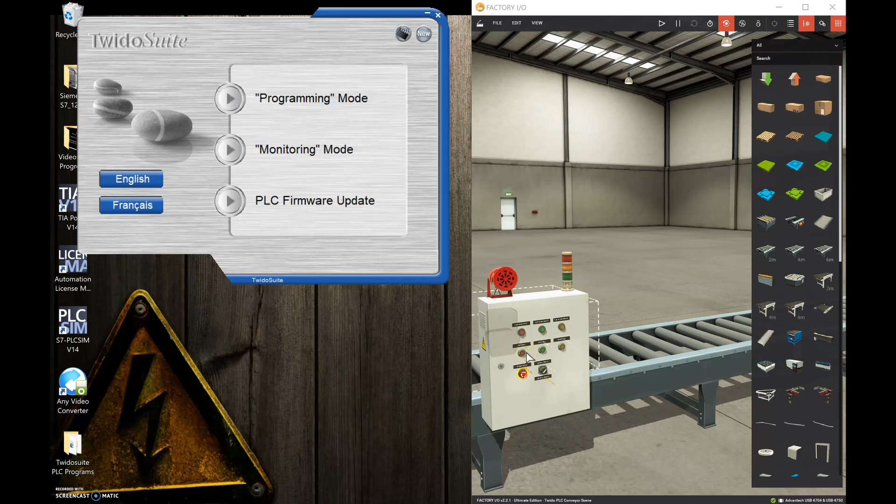All right, so let's see if we can get the TwidoSuite up and running, get everything set up for this guy, and then get it talking to the Factory IO, and then we'll do a 2-wire control just to start off with. So with the TwidoSuite, we're going to start off with the programming mode.

Okay, so we're going to create a new project. We're going to call this guy 2-wire control. We'll hit create.

Okay, next thing we're going to do is we're going to go to describe, and we're going to replace this guy with the PLC that we actually have.

Okay, so the base that we have is a compact base, and we have the CAE 40 DRF. So we're going to grab this guy, left click and hold the left mouse button down, drag it over, and drop it onto the page. There we go. Once we've got that guy in, we've also got the analog card.

So let's go to expansion modules, analog expansions, and let me just double check—I believe this is a TM2 AMM6HT. So just double check with the analog card that is beside your PLC. Looks good. Once those guys are there, then we're going to double click on the Ethernet connection.

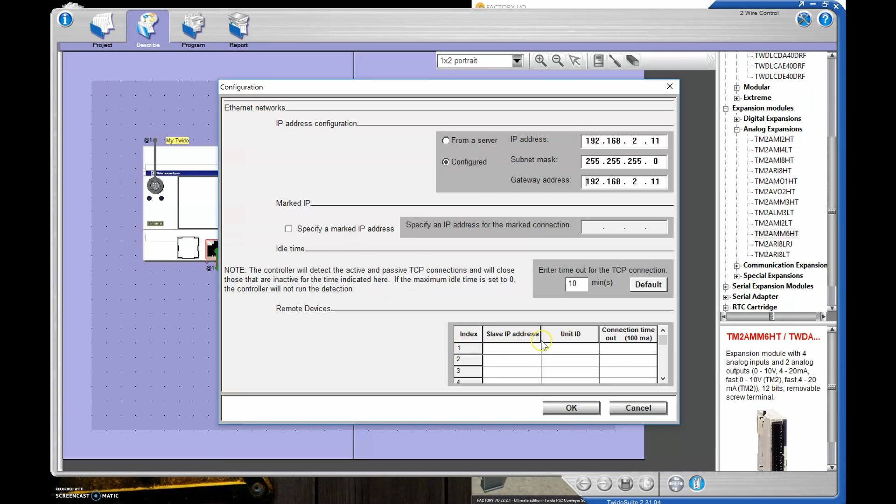Looks good. I'm not going to put in the touchscreen or anything yet, we're just doing the PLC. So we'll hit OK. Excellent. And the next thing we're going to do is we're going to go into program.

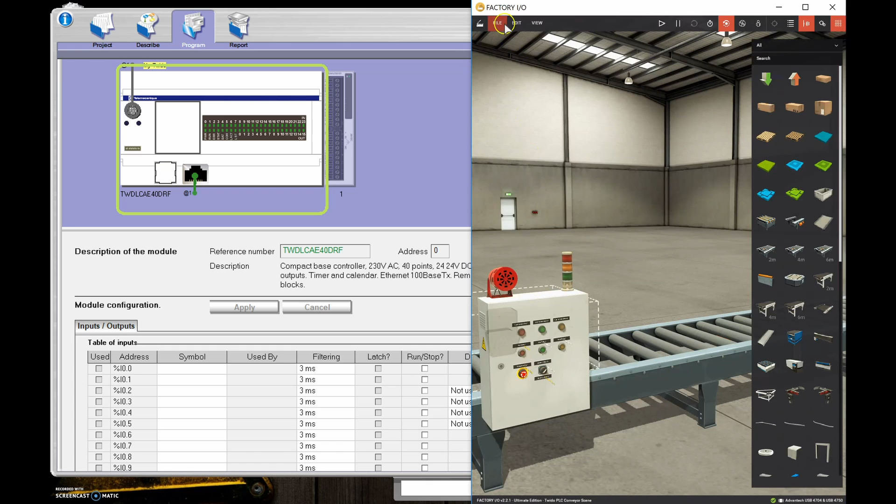Okay, so let's drop in all of our I/O that we covered in the previous video there. So let's bring up our Factory IO. We're going to go to File and Drivers. Excellent. Okay, and everything's already set up from the previous video there.

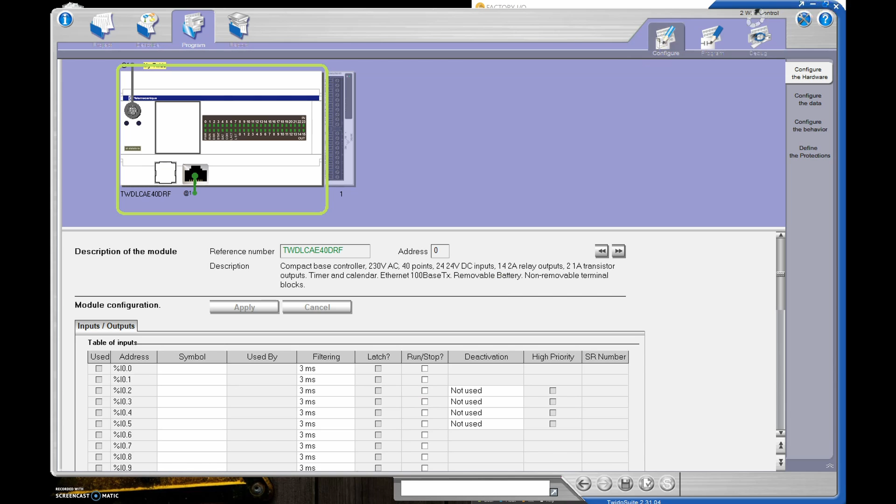So let's start off by just typing in each of these addresses here. So for input 0, that's going to be our e-stop. Let's see if we can make these guys smaller, and then we can have both on the screen at the same time—otherwise whenever I hit the TwidoSuite, I lose the Factory IO. So let's make this guy a little bit larger. Nice, and we'll just move this guy over just a touch. Right on, now we can see everything. Oh, that's cool—the Factory IO moves over so you can see the values easily and nothing's covered up.

Okay, so first one we're going to do is emergency stop—you know what, let's just do e-stop. And again, whenever you type these guys in, regardless if it's lowercase or uppercase, it always makes it uppercase when you're done. Okay, this next one is stop button, so we'll do stop push button. Then the next one is the start.

Then what have we got? We got the reset. And we've got the selector switch. Let's make this like this so that we're not crowding everything. And what else do we have? We have the diffuse sensor. Beautiful, those are all of our inputs, 0 through 5.

0 through 5 looks good. And then we'll scroll down here to the bottom here, and here are the outputs. So I left the output 0 open just so I could match up these lights with the actual inputs so they were identical numbers. So this one right here is what? The red indicator. Okay, then we've got what? Green. And yellow.

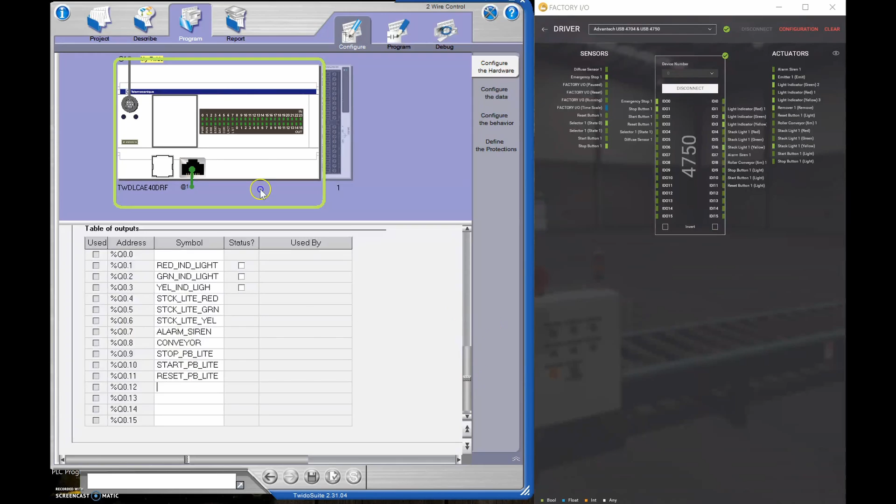Sweet. Okay, now we can go right to program, or we can hit apply. Either one, we're going to apply the changes. So we'll hit apply here.

Looks good. And the next thing we're going to do is we're going to hit program to bring up our ladder diagram.

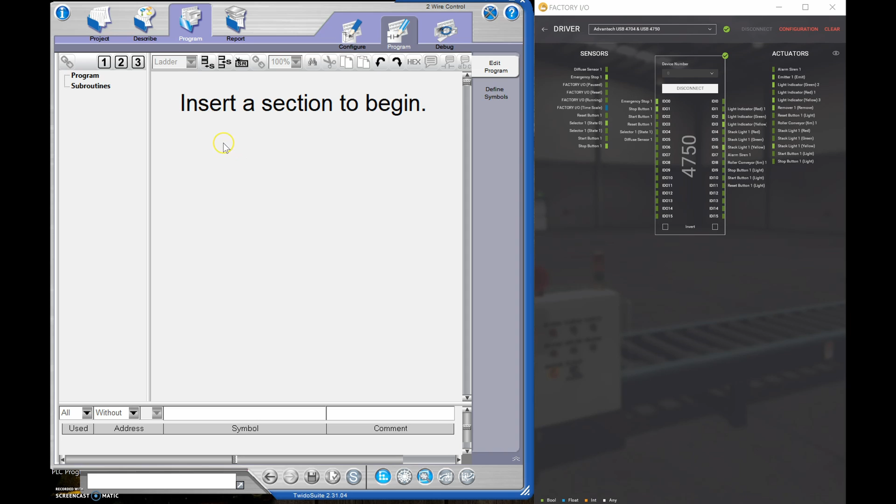So now that we have all of our I/O already labeled, what we can do first is just drop in a rung, and as we add in our instructions and type in the name, they should come up, and we can just drop those names in there.

So we're going to do a 2-wire control, so we're going to use an XIC, and we'll have that controlling the conveyor, right? So what are we going to use? Let's use just the start push button, and we'll build it up so that when we hit the start push button it turns on the conveyor.

Now the start push button was what? Input 0.2. So we're going to type in input 0.2 and hit enter. Looks good. Now let's see - it's not like the Siemens where it brings it right up. So again, percent input 0.2, and because we've already labeled it, that label comes in.

Okay, our conveyor, the outputs are Q, and the conveyor is what? Q08, right? 0.8. Excellent. So when we hit this push button, we're going to turn on the conveyor, and let's drop in some lights as well.

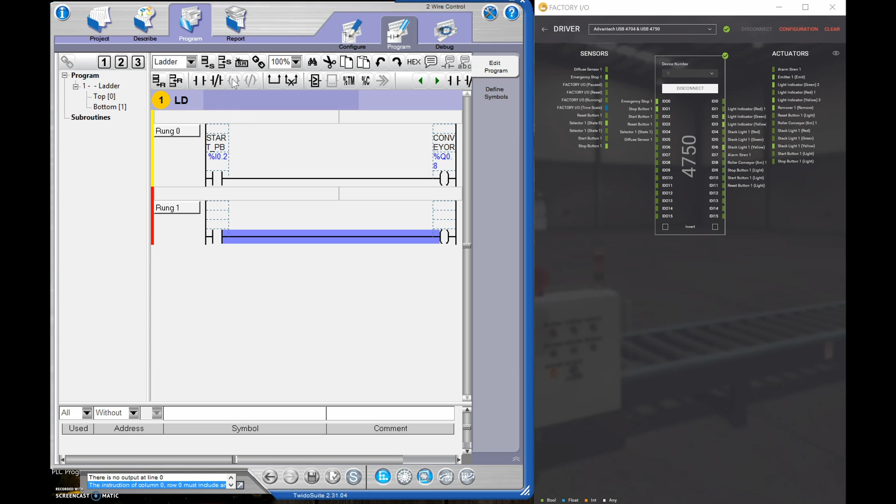So in addition to that, we're going to do another rung here, and we'll say when the conveyor is on, so we'll examine that it's on, then we'll turn on a green light. So we're going to label this the same as the conveyor, percent Q 0.8.

Looks good. And over here, we're going to have the output, and let's do the stack light. So the stack light for green is output 0.5. That's Q 0.5. Excellent. Okay.

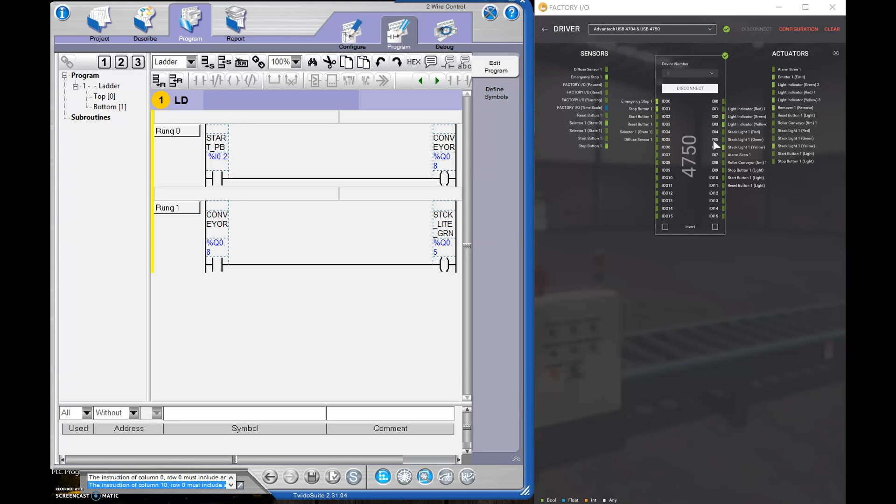If the conveyor is not on, then we're going to drop in another rung and use an XIC. So this is examining that it's closed or on, or that there's voltage. In this case, the voltage is going out to the light, and we're examining that the conveyor is actually on.

This XIO is examining that something is off, or a 0 in the memory. So as long as this is a 0 in the memory, or there's no voltage going out to the conveyor, let's turn on the red stack light. Okay, so we'll hit that.

And we're going to do the conveyor again, so Q 0.8. And that's going to turn on our stack light. So that is percent Q 0 - stack light for red is 4.

Sweet. Okay, so what we're going to do is we'll compile this. So the compile is right here. And instead of compile, it says analyze the program. So we're going to click on this and double check that everything's cool, that we have no errors.

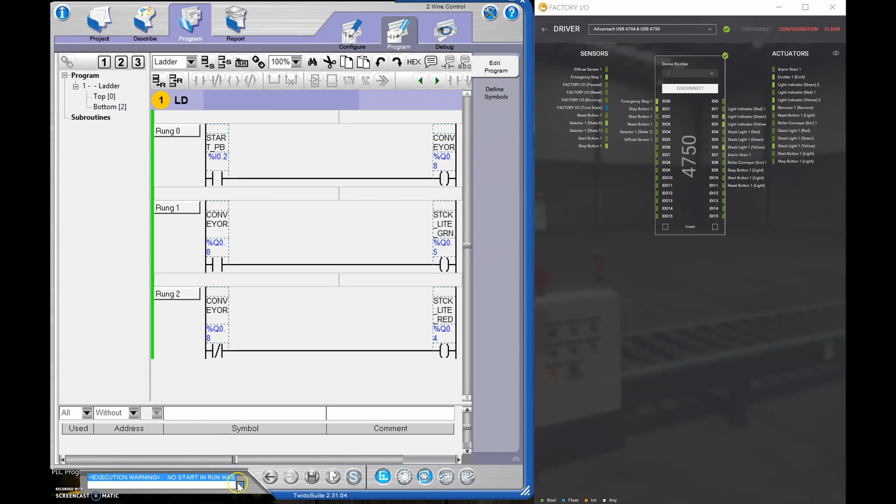It has one error right here: no start in run was selected. Okay, I think we're good to go though, because everything has a green light. Looks good. So let's see if we can download this to the PLC now.

All right, so the next thing we need to do is come up here to Preference. When we click on this, it brings up this window here where it gives us a bunch of information on the project, and down at the bottom it provides us with our connections to the PLC.

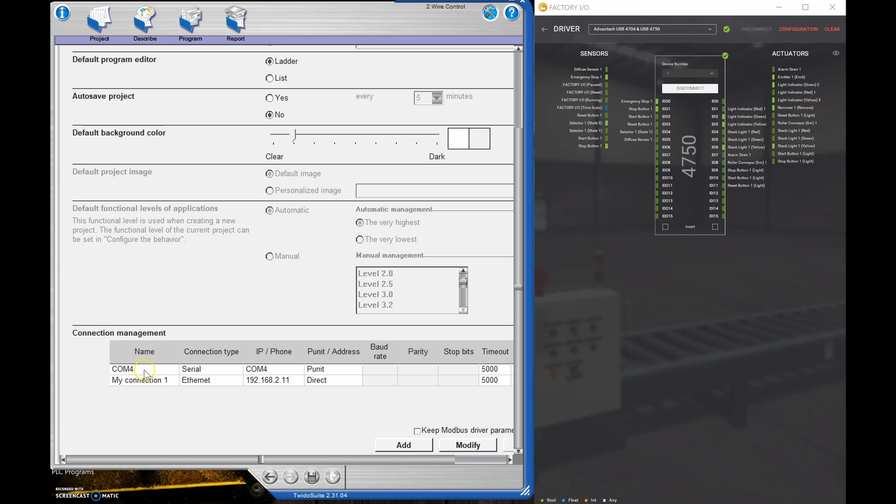So at this point, I've already done a number of projects, and so it's come up with COM4, and it's also come up with my Ethernet connection. But that's because I've already previously set this up.

So what I'm going to do first, and what you're going to do if you don't have the Ethernet connection, is you're going to use the serial cable first. The name of the serial cable is TSX C USB 485. I'll put a link in the description below.

So that one is the one that goes from USB to the serial connection on the front face of the PLC. So in order to find out which COM port you're actually connected to, we're going to type in here on our search device manager.

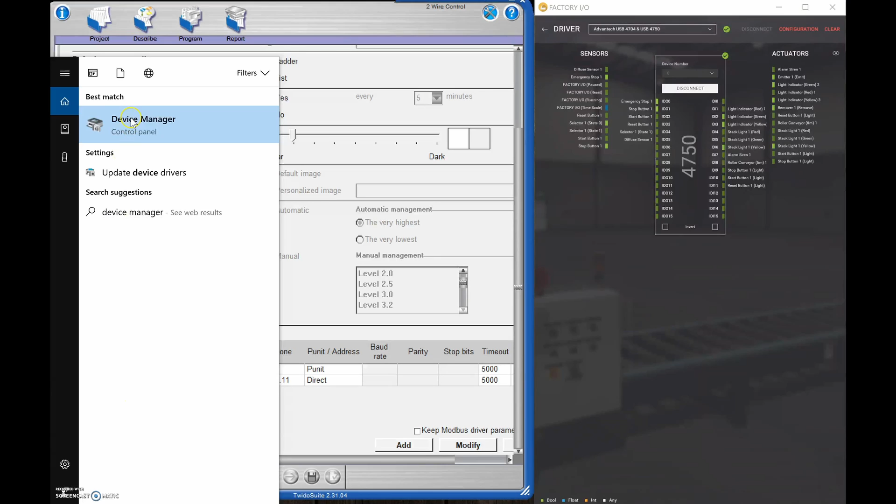Okay, if I can spell today. You'd think it would be smart enough that I could pick that up. Okay, there we go. Okay, device manager.

And we're going to open this guy up now. And if we scroll down, we'll be able to see - where is it? There we go, Universal Serial Bus Controllers. So we'll open this up, and we can see here the TSX C USB 485 is connected there.

Okay, so the device is working properly. If it's not working properly, you can go to the driver and try to update the driver to get it to work. I found that sometimes it just doesn't come in - it's not worth fighting with. It's best just to turn your computer on and off with the cable connected up, and it will, if you have the driver, connect up to it. But sometimes fighting it just doesn't work if it's not working properly.

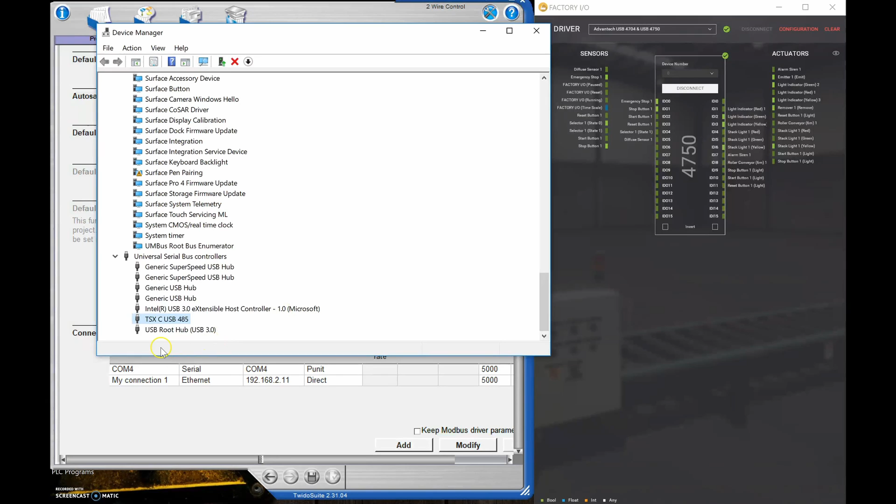Okay, but I don't think that showed us the COM port it was connected to. Oh, here we go, port 0004. So it does tell us that it's connected up to COM4. Anything else that tells us that?

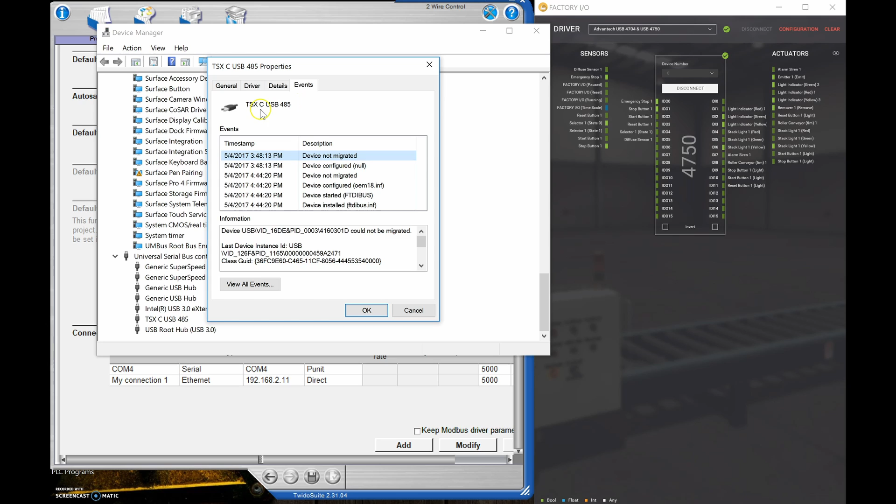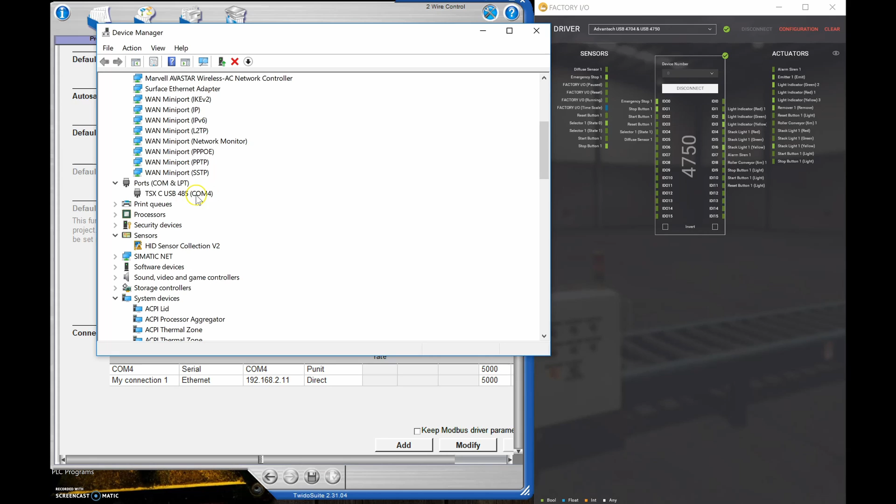No, it doesn't tell us anything else aside from the fact that it does say port 0004 right there. Another place to see which COM port it's connected to is to scroll up here, go to your ports. This is minimized here, so you'll open up your ports, and then right there you can see

the TSX C USB 485 is connected up to COM4. So that's the way you can determine which COM port to grab when you're doing this connection. Okay, so let's go back to the TwidoSuite. We've already got the COM port in. At this point, you probably don't have the Ethernet connection in, but you can provide this one. So you're just going to hit Add, and it'll come up with an Ethernet connection, and then you can drop in the IP address that is provided for you on the Lamicoid on your PLC. Or you can just make up an Ethernet connection based off of whatever your computer's IP address is as well.

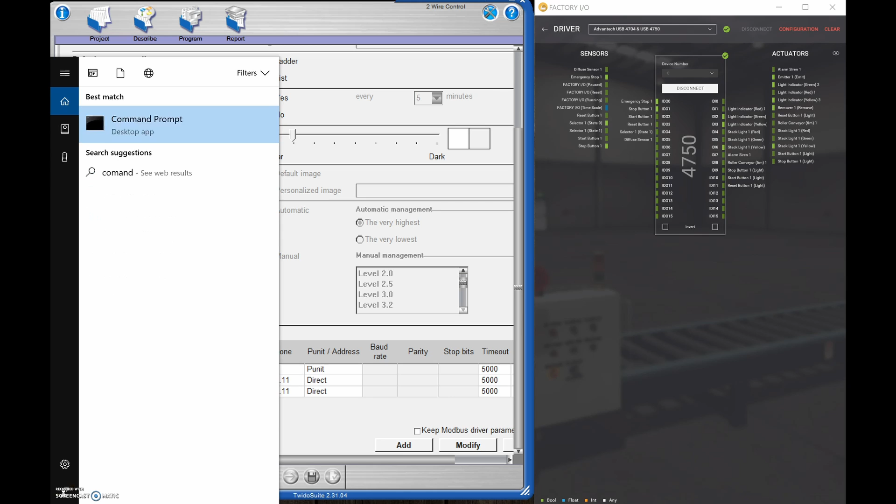Now, how do you know what your IP address is for your computer? Well, we're going to type down here command prompt. And then we're going to put in ipconfig and hit enter, and it gives us all the information on our computer. So we can see here that the address for the computer that I'm using right now is

192.168.2.230. Subnet mask is exactly what we saw before with the PLC, 255.255.255.0, and the default gateway is 192.168.2.1. So you can grab an IP address that matches with this value right here, and then just give another value instead of 230. If you're working in the lab, then you have to give the exact IP address for the PLC at your station. There's a Lamicoid right there that tells you that IP address.

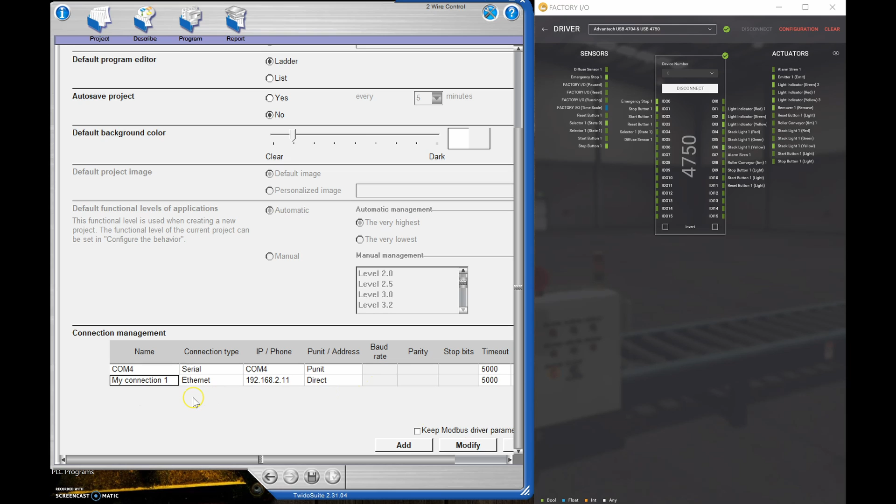Okay, so we've got our COM port, we've got our connection now. I don't need this guy right here, so I'm going to get rid of that. Once those are in, then we're going to scroll up to the top, and we're going to hit apply. And now we're ready to drop this onto the PLC.

We're now going to go back to program. Okay, once we're in program here, then it looks like I've made a small change there. So let's drop this down to our PLC. So the next thing we're going to go to is debug. Previously we were here in preference. We're going to go to debug.

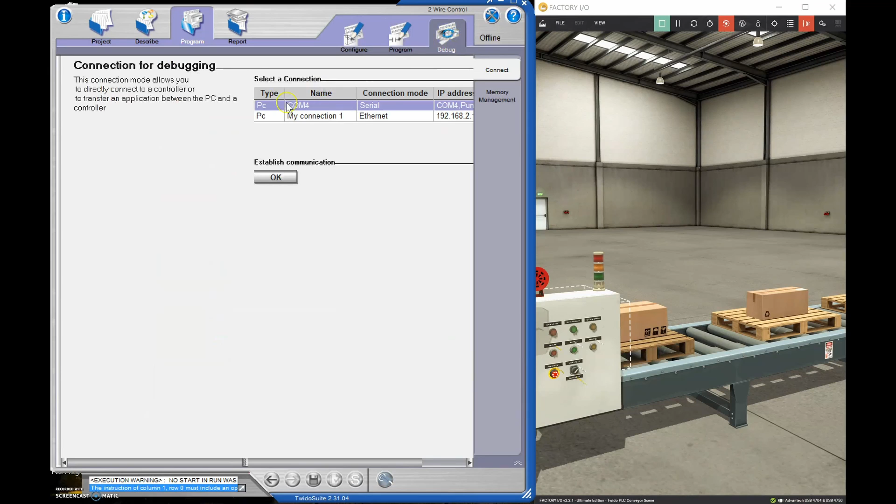Okay, we're going to use the COM port here. Let me just make this a little bit bigger so you can see what we're doing. And we're going to try to establish communication with the PLC now. Looks good. Okay, we're going to transfer from the PC to the controller. If you were in trouble and you had lost your program, you can download the existing program from the controller to the PC. But we're doing this guy right here, from our computer to the controller.

So we're going to left click on this guy and then hit OK. Looks like we're going to overwrite whatever is there. Takes a little bit of time for the program to go in. It's transferring all the data right now. Once the program is actually in there and you're just making minor changes, then it shouldn't take this long to transfer in.

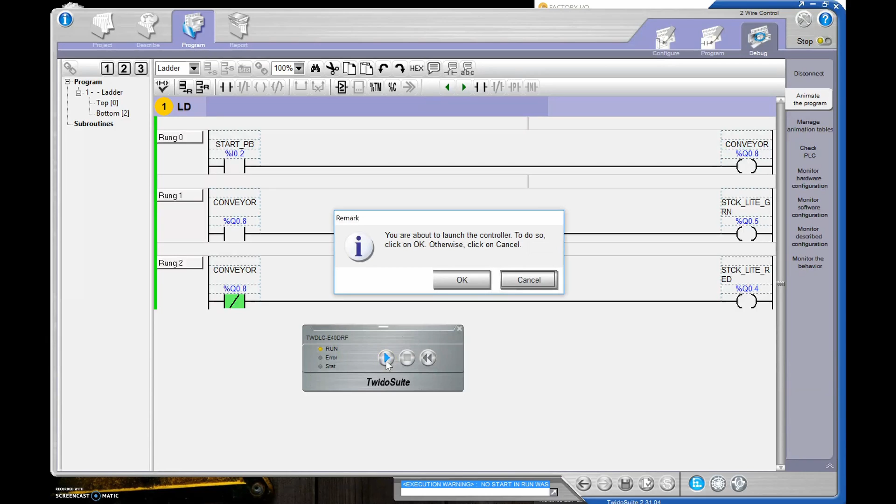There we go. Okay, so now we've got our PLC program. It looks like everything's running right now, but it's not actually, because you can see here that we have a yellow light on the run. So we're going to hit the play button. We're going to launch the controller, and we're waiting for this to be a green light. Nice, there we go. Now we're talking to the PLC. So you can see that as soon as we did that, the stack light came on here.

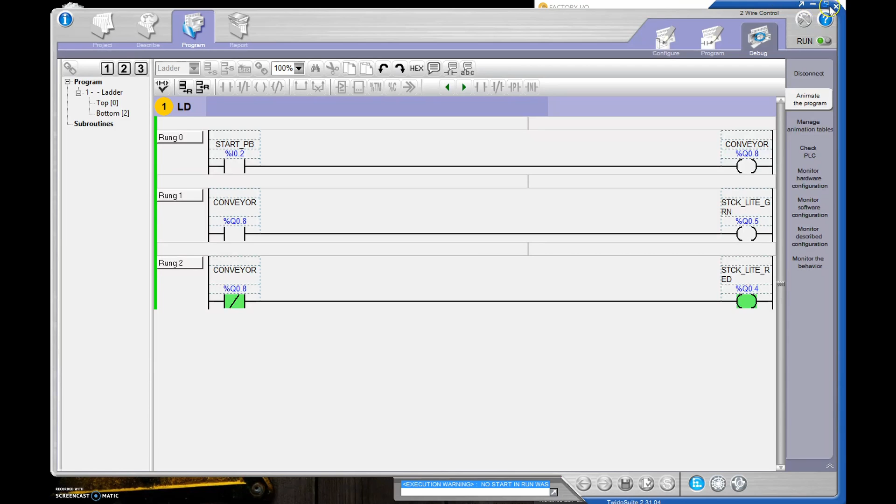Let's minimize this so we can see our factory I/O. Looks good. And let's see if we can make this guy a little bit bigger now.

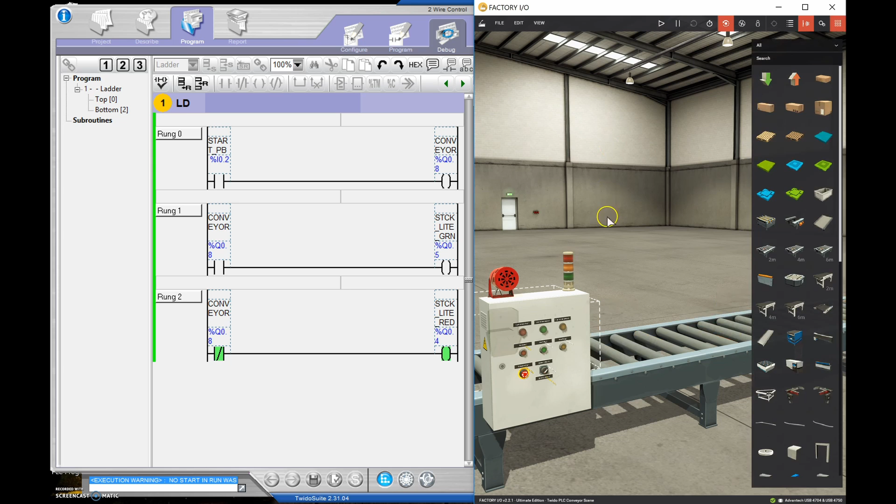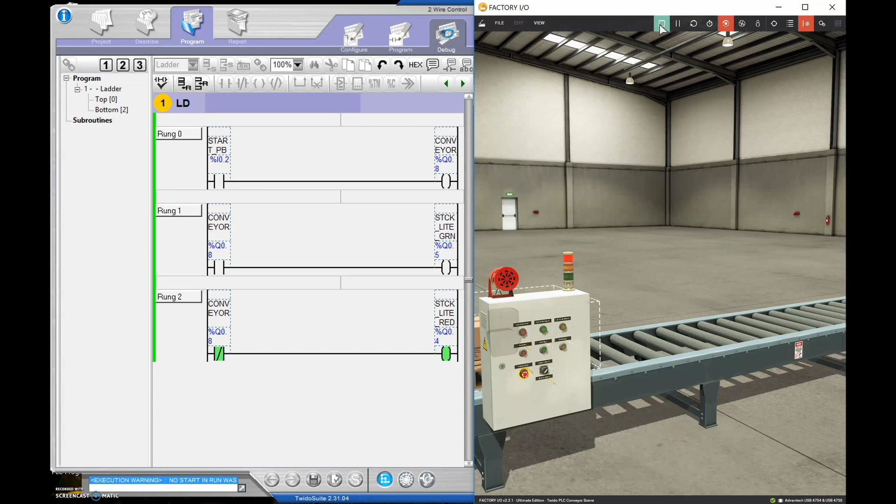Excellent. Okay, so if you're not in the run mode yet, then again, you're going to go to drivers. If you haven't connected in yet, then you're going to hit connect, and you're using, again, the 4750 from the USB Advantech, from your drivers list right here. That was from the previous video. Then we're going to go back to this window right here, and we're going to hit play. Sweet, and as soon as we did that, you can see that the red light turned on right away.

Let me just scroll out a touch so we can see everything going on. You can see that right now the conveyor is not on. This is true because this is an XIO, or examine if off. The conveyor is off, so the red light is on right here for the stack light, now on output number 4.

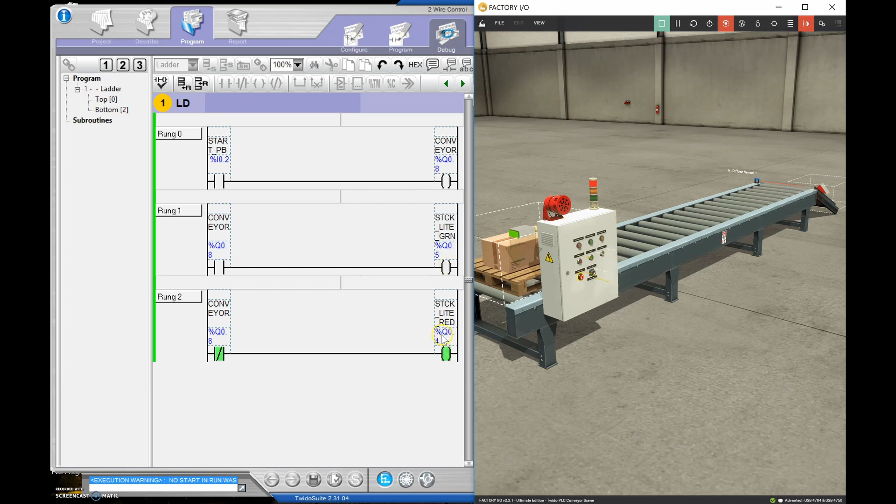Excellent, so all it's waiting for is for us to hit this push button for the start. Once we press this guy, then this will be true. The conveyor will turn on and the green light will turn on as well, and the red light should turn off. Ready in 3, 2, 1.

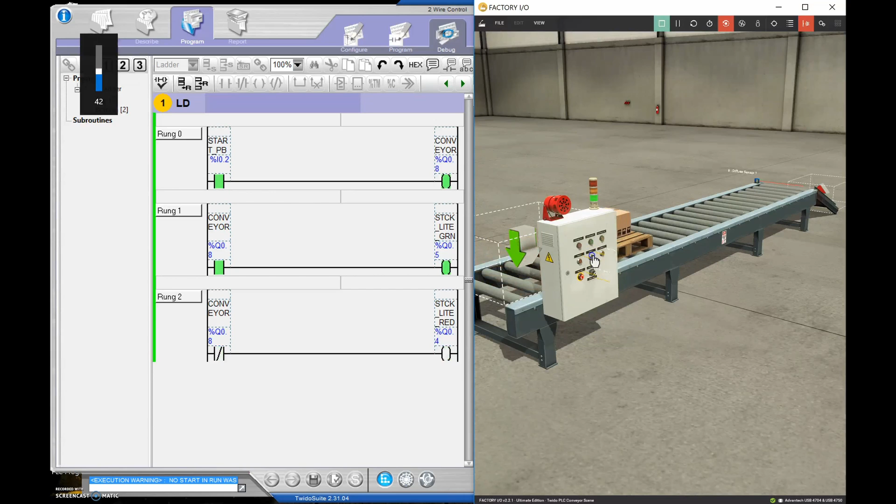There we go. Let me turn up the volume here. There we go, and then you'll see over on the right hand side that the pallets will disappear there. Cool, eh?

You can change the timing of when the pallets are coming out of the emitter. We'll leave that for another video.

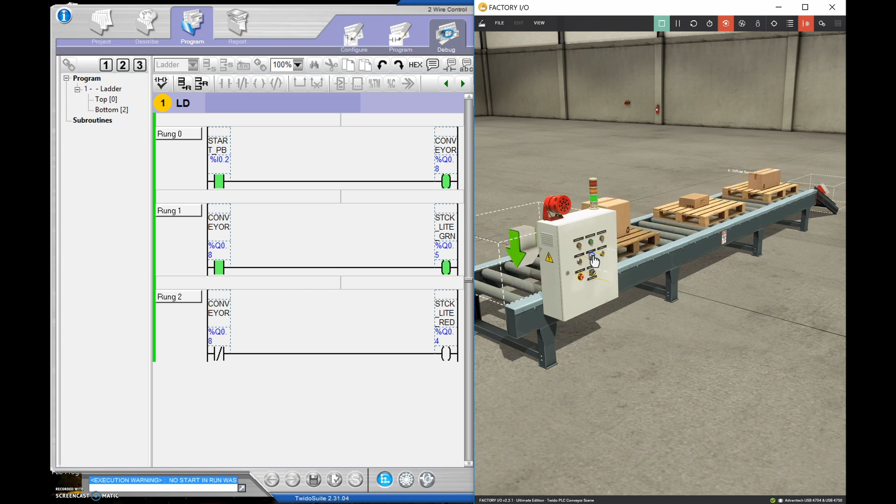This is simply a 2-wire, so as soon as I let go of the initiating push button right here, then the conveyor should turn off, the green light should turn off as well, and the red light should turn back on. A 2-wire is just like at the grocery store when you're trying to get your groceries to come down, or your kids are pressing the conveyor and all your groceries are going to the end. Just by pressing this push button, then it turns on.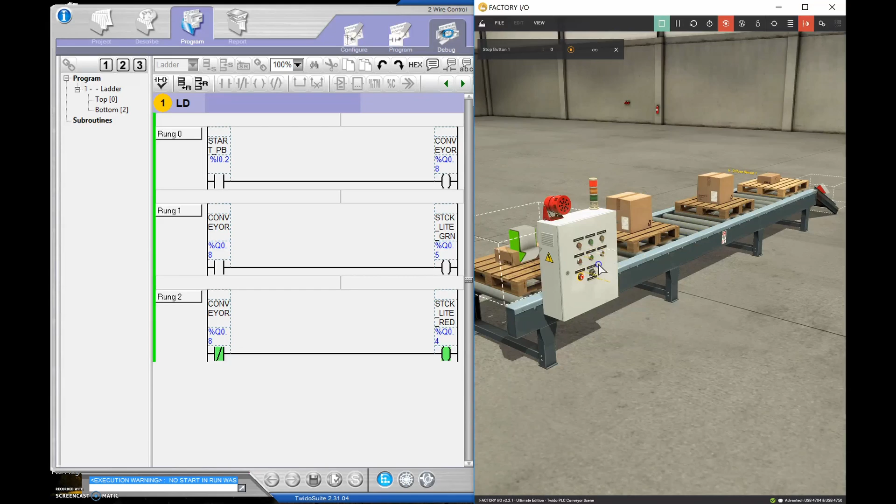Hang on, let me just move this over. That's frustrating because I keep hitting the tag there. Pressing this guy turns on my conveyor and turns on the green light to show that I'm in the run position.

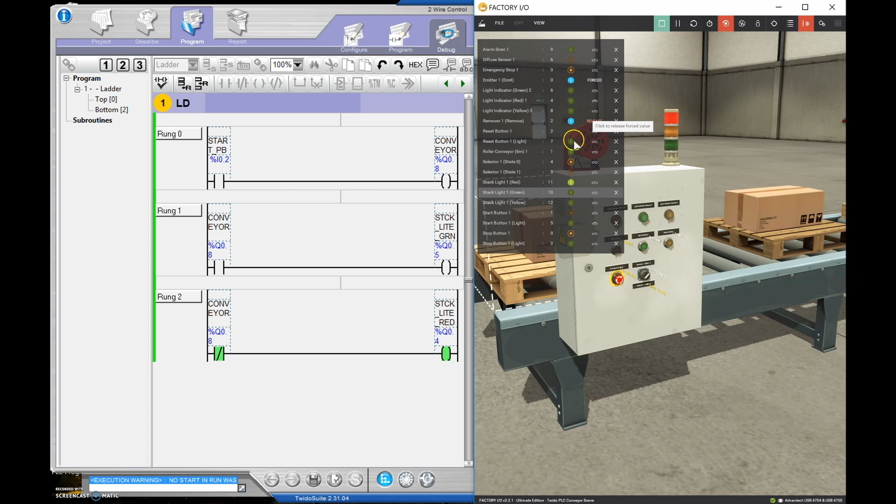If we wanted to see our tags as well, then we can go here and dock all the tags. That shows us everything that's going on right now. We can see that the emitter and the remover are both forced, they're not part of our program whatsoever. The stack light is on right now in the red light. When we press this push button right here, then we should find that the green light turns on and our conveyor - where's our conveyor? Roller conveyor here should turn on as well.

Beautiful. Excellent, okay, so everything's working nicely.

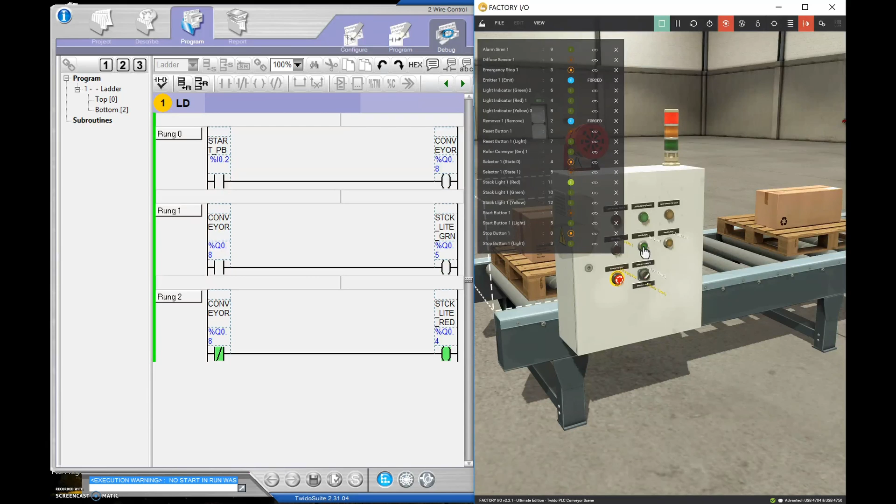Let's see if we can get rid of these guys first. So we'll clear the dock tags. We use the serial cable to talk to our PLC. Let's disconnect right now, and let's see if we can connect in with the Ethernet cable.

Okay excellent, and let's see if this guy is working now. So what I'll do is I'll disconnect my serial cable. And putting that initial program on there, we dropped in the IP address onto the PLC. So let's see if we can connect in.

Right now I have my connection from the computer into the switch and from the switch over to the PLC. Okay, so let's try and connect up with the Ethernet now. Let's hit OK.

And of course that didn't work. What I forgot to do was I forgot to connect up to my modem at home, so you have to be connected to the network. The switch alone doesn't allow you to talk to it.

So I've now reestablished that. I've gone into my settings, reset my Ethernet connection here. And I'm cool - it says it doesn't have a valid IP configuration, but it should be fine now. So let's close these guys up and let's try and establish communication again.

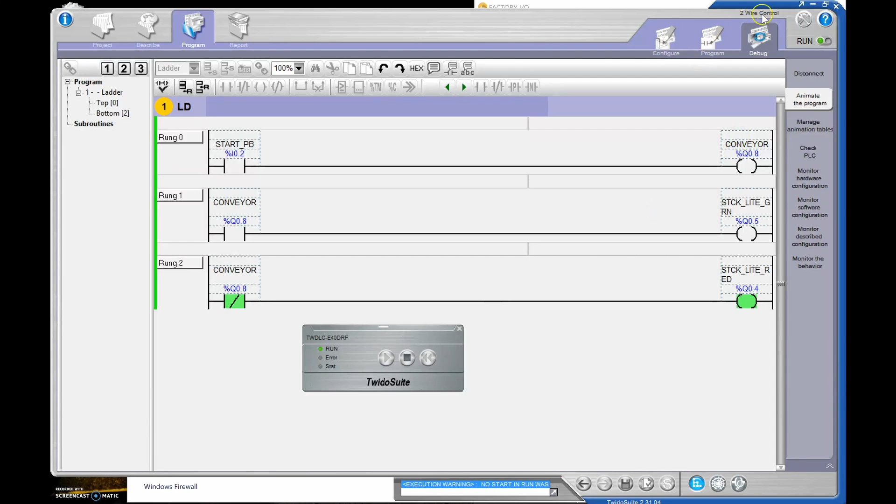Okay, let's just make sure that we're working properly with the factory I/O. Let's get rid of this guy. We're in the play mode again. Let's scroll out, let's get rid of our sensor tag so I don't have to click that. I can just hit this push button and have it working properly. Nice.

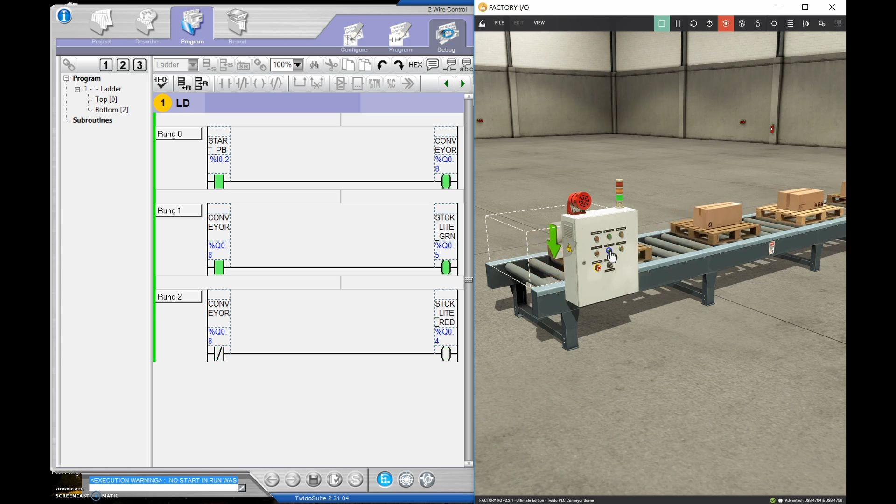There we go. All right, so we've been able to set up everything on our Twido PLC. We're able to initially set up with the serial cable. We disconnected the serial cable. When we had dropped in our previous program, we dropped in our IP address. And then as long as you have your connection into the hub for the room, or your hub into your modem, then you should be able to connect up with your Ethernet connection and you won't require that serial cable again.